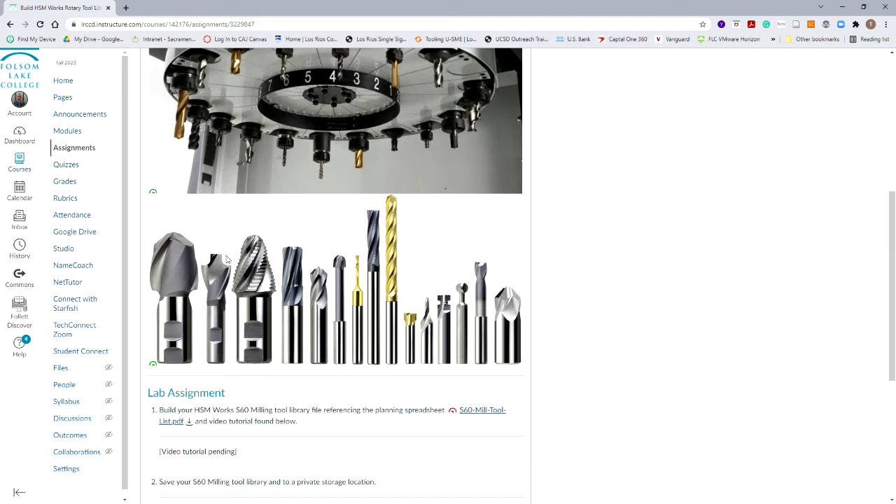Okay, so rotary tools tend to go in what's called a carousel or tool magazine instead of a turret. The difference is on a lathe, the turret actually moves and holds the tools during its cutting process, whereas the carousel or magazine is an automatic tool changer, so it holds the tools and changes them out with the spindle. The example here is an umbrella style, I believe, on a Haas machine. And rotary tools have to spin, so they are all centerline tools that spin along the Z-axis, and they have different profiles. Okay, so we've got a variety displayed here.

The first thing you need to do is download the tool list in PDF format so you can reference it. But also, once you've logged into the lab, upload your lathe library. The reason is, if we look at the tool list, I've got 3 tools that we'll be able to copy over from the lathe tool library and use them in the mill library with one slight modification. Make sure you've uploaded your lathe tool library, and it'll save you the time of building those 3 tools.

Hopefully this process goes much faster than the process for the lathe tooling, because we're going to use a common holder for all of these tools, so we don't have to deal with the technicalities behind that. We're going to use ER32 collets, which should hold this entire range. ER16s might be more appropriate for the small diameter ones, but just to simplify things, we're going to use the ER32. So every single one of these tools has the same holder. I've given you the part number, and in most cases the information on the spreadsheet will be enough to build a tool without actually going to the catalog page. So that's up to you.

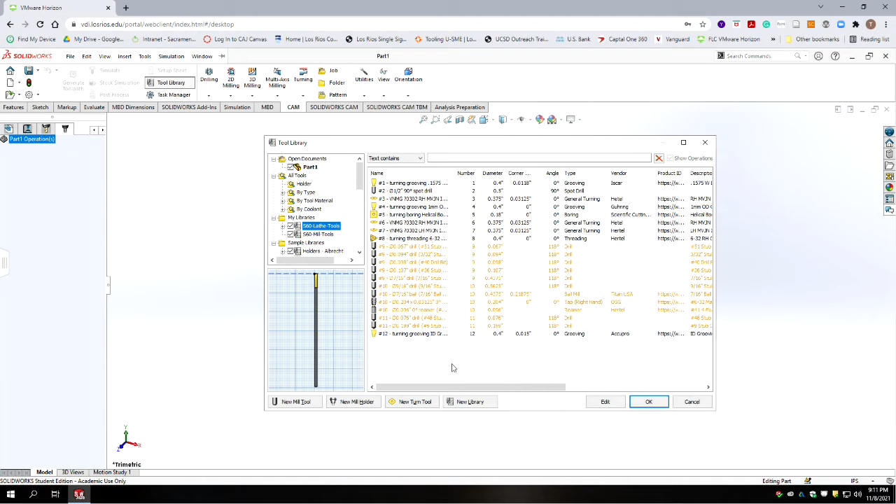Okay, so now let's look at what tools we can copy over. There are 3 tools that I said we could copy from the spreadsheet. If we return to the spreadsheet, it was lathe tools 6, 10, and 11, which are a spot drill, a number 36 drill and a 6-32 tap. We can copy the spot drill, and I believe if you hold the control key down, we can grab the tap and its tap drill. It should be the .107, number 36. We'll do copy, go to the mill tools, right click, paste, and it brought all the information over.

Now there are two changes we need to make. Our tool magazine can easily hold 21 tools for the mill we're using, so we're going to use the tools that are on the chart. So we need to update these tools to be their corresponding tool numbers on our mill chart. And then there's a box we need to check that tells it it's a rotary tool.

So if we go to spot drill, which one is that in our chart? It is tool number 6 in our mill. So we're going to right click on it and change its position to 6. And then we need to check this box that says live tool. On the lathe, if it's on center line, it's not a live tool, it's called a dead tool. And I'm going to select the live tool option, which tells it this is a rotary tool, so it'll output the codes for that.

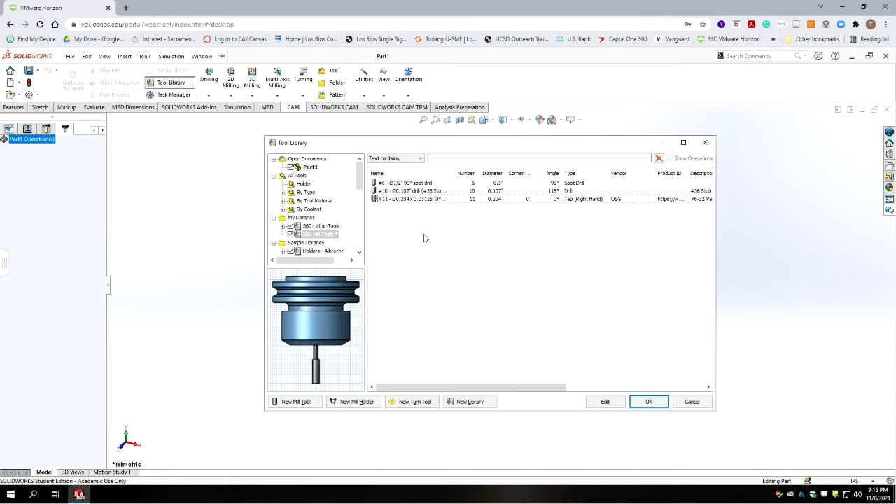Okay, now our tap is now orange because we've got a conflict. And on our list it was a number 11. Okay, we need to check that it's a live tool. Otherwise it won't put the spindle code in to spin it. So there we've got those three tools. It looks like I omitted the vendor and vendor information, which I should have put in there. But there you go. You've made your first 3 mill tools, and you haven't really had to do much. Okay, so we're going to hit OK, and we're going to go back to our tool library.

And now we need to build tools 1 through 5, 7 through 9, and 12 through 21. Again, I'm only going to walk you through building one of each tool type, and you need to build out the rest on your part from the spreadsheet. Okay, so here we go. So we're going to go and look at our spreadsheet and see what our next tool is. So we're going to build this end mill here. It's a 3 flute 3/8 diameter.

We've got a bunch of information here. So overall length's 2.5, shank diameter is 3/8, cutter diameter is 3/8, and the length of cut is a half. If we can remember most of that, that's pretty much all we need. We need the brand AccuPro, and we'll want the URL. So let's go to the URL first and take a look at what this looks like. Alright, so it's a 3/8 end mill. It has 1/2 inch length of cut, but you notice it's got cutters on both ends.

So I chose a more expensive end mill. It's $50, but it has 2 ends on it. So when one side's worn out, you just flip it over in the holder. And this end mill for a single-sided, it'd be way more than $25. So in the end, you're saving money if you're careful with handling the tools. If you're not careful with handling the carbide tools and you chip off these ends, you've just wasted money.

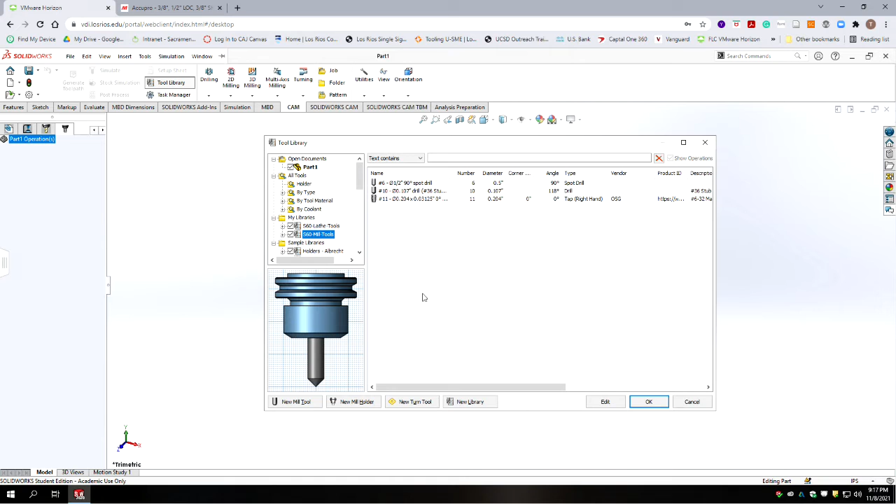So anyway, we're going to take our URL information and we're going to go ahead and copy that now, and we'll go back to HSM, and we're going to do a new mill tool. Okay, it's going to be tool number 1, and our product ID is the URL we put in. And this was an AccuPro, which is actually, I think, MSC's private label. Our description is 3/8 inch two flute end mill. And we'll leave the comment alone. Actually, I'm sorry, I made a mistake there. It's a 3 flute.

Okay, we're going to go to the cutter. It's 0.375 in diameter. Okay, its length of cut was 0.5. Shank was 0.375. And our overall length, I don't remember what it was. Let's go back to our spreadsheet. Overall length is 2.5. And if it's not hassling us about the other numbers, why don't we just keep them where they're at? And it's a flat end mill.

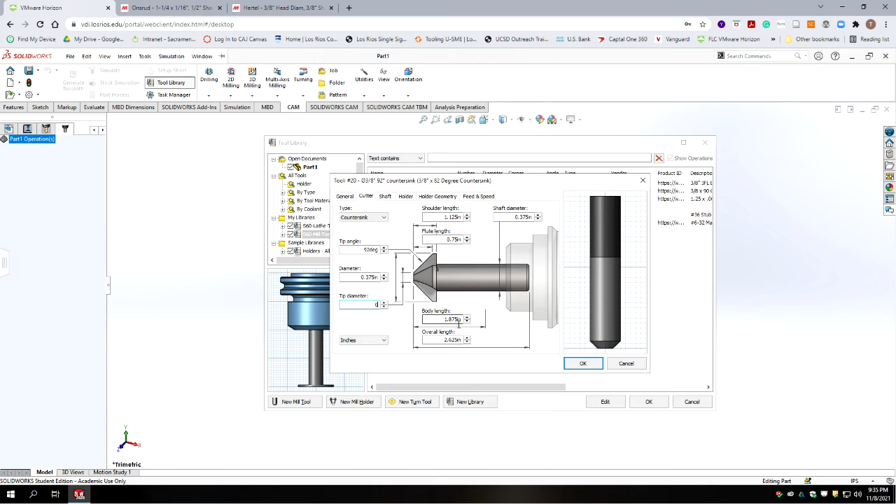Okay, and our diameter is 0.375, and our tip diameter is going to be 0, so that's a sharp point. This is actually 82 degrees. Okay, our shaft diameter is 0.375. Our shoulder length is academic, and our body length is somewhat academic because we don't have a difference in diameters. In reality, ours looks like the picture on the right, not the one on the left.

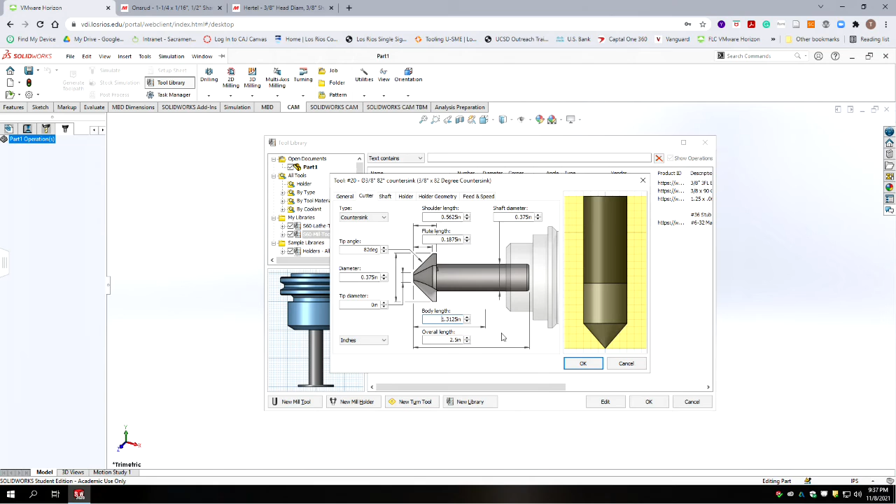We could put some flute length in. I don't think it's that much. It's probably closer to half of 3/8. So we'll put 3/16, even though I think that is most likely a little too much, but again, because the shaft diameter is the same as the cutter, there's no differentiation there. So let's put in the overall length, because we do want that to match. And the overall length of the countersink is 2.5 inches. Okay, that gives us a little better picture of what it's supposed to look like.

Okay, shaft, leave alone. Holder, we're going to select that same Ameritool holder that we have for all the others. Then we're going to go to holder geometry, skip all that. Here we are at feeds and speeds. The number of flutes is 1. It's a single flute. I think actually going higher, say to 7,000 RPM, would be appropriate with a single flute cutter. You need it spinning pretty quick. You could go faster than that if your machine's capable of it. My machine has an 8,000 RPM ceiling, so I don't like running it too long at that top end in the gearbox. Okay. And we've got tool 20, which is our 3/8 82 degree countersink.

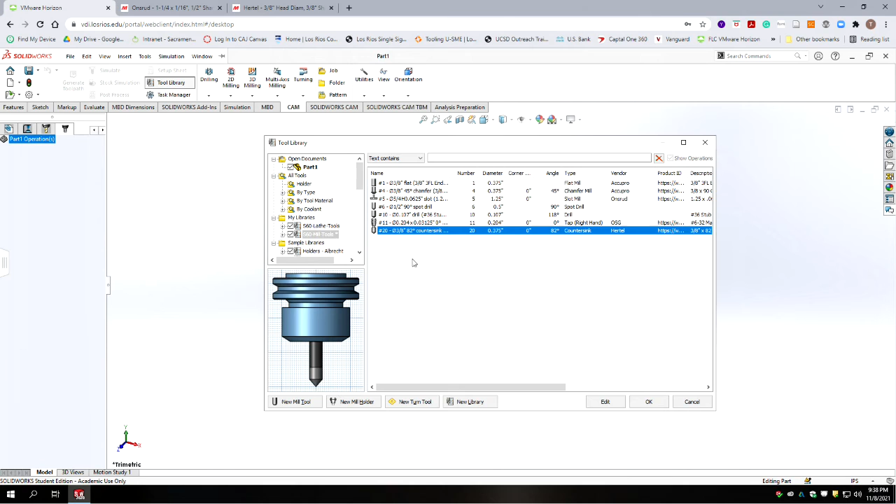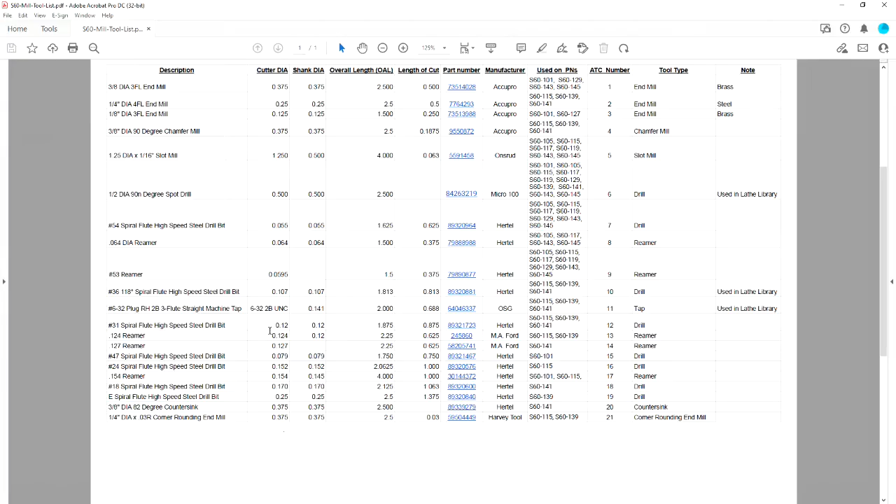Alright, the last tool that I'm going to do in the tutorial, and it should be the last tutorial that you do, is this corner rounding end mill, made by Harvey Tool. They're another pretty reputable tool company. It's only used on 2 parts. It puts the 30 thousandths radius on the outside of the 2 post parts. So let's take a look at what that tool looks like. It's got this stubby face looking thing, but the radius on it is a 32nd. If you have it set correctly, it does a really nice job of putting a corner round on it. If you go a little too deep, you're going to see a little step. And if the diameter's off, you get another step.

But, okay, we're going to grab that product information. We're going to go back to our tool library, and we're going to make a new mill tool. Okay, and this is going to be tool 21. That's a carbide tool. Okay, description, 3/8 by 0.03 corner rounding end mill. Okay, we got our product ID, and it's Harvey Tool Company.

Here's our cutter. We're going to change the type. They're calling it a radius mill. I've always been told they're called corner rounding end mills, but that's okay. We'll call it a radius mill. A little more specific. So our radius is 0.03 for 30 thousandths. It looks like we need to look up the diameter of the actual tip of the corner rounding end mill. So let's see if the specs tell you that. So the tip diameter is actually 1/4 of an inch. 0.25.

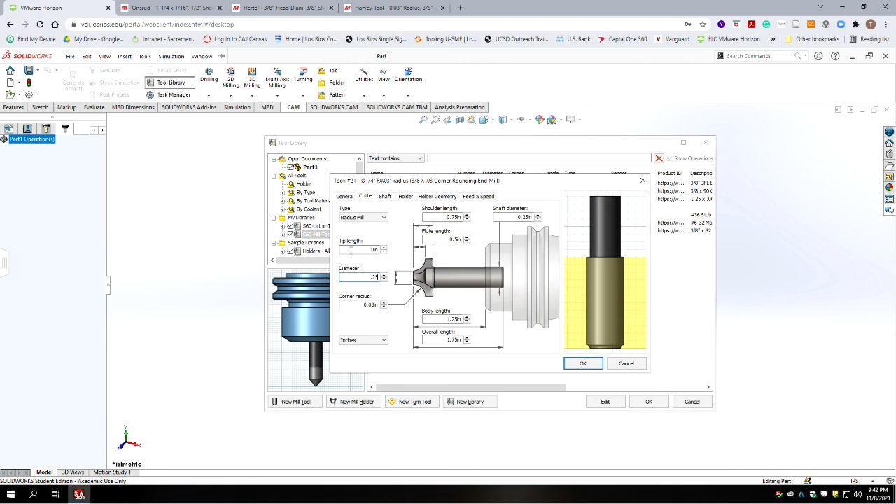So we have a 30 thousandths flute length. Our shoulder length should be the same. Okay, so for this cutter, we've got a shoulder length of 30 thousandths. We have a flute length of 30 thousandths because it doesn't really have a flute beyond that. Corner radius of 30 thousandths with a nominal tip diameter of 1/4 of an inch. Shank diameter is 3/8, and a body length of 1.5 inches with an overall length of 2.5 inches.

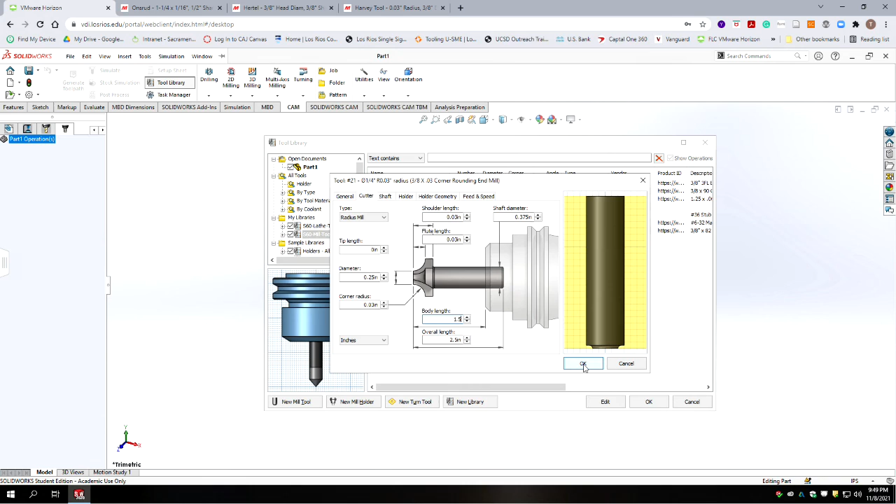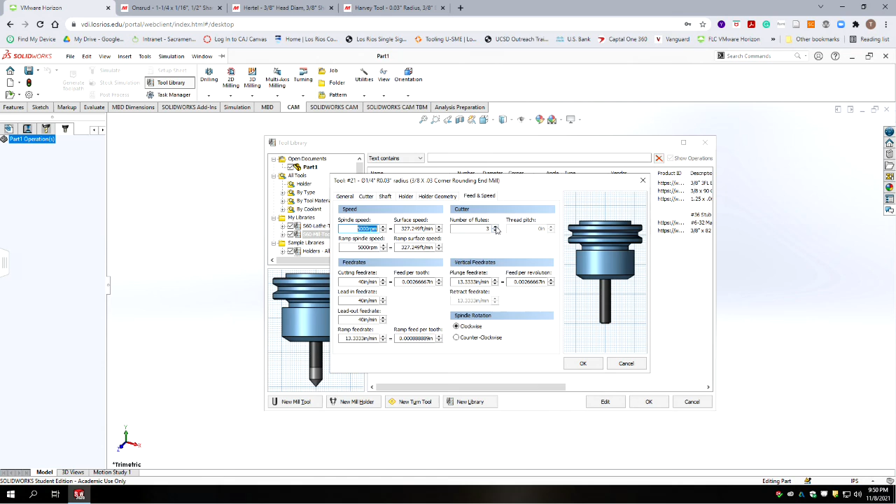Alright, so we're going to move on to the shaft. I'm going to leave that all alone. We're going to select our Ameritool tool holder, ER32 with a 1.8" gauge length. Holder geometry stays the same, feeds and speeds. This is a 3 flute end mill. We're only going to be cutting steel with this, so I'm thinking 2,000 RPM with that sucker. And let's say okay.

Alright, so you have all the tools to make all the tool libraries. So you have a bunch of drill bits and reamers to make. When you're all said and done, you should have a total of 21 tools, including the ones we did in this tutorial.